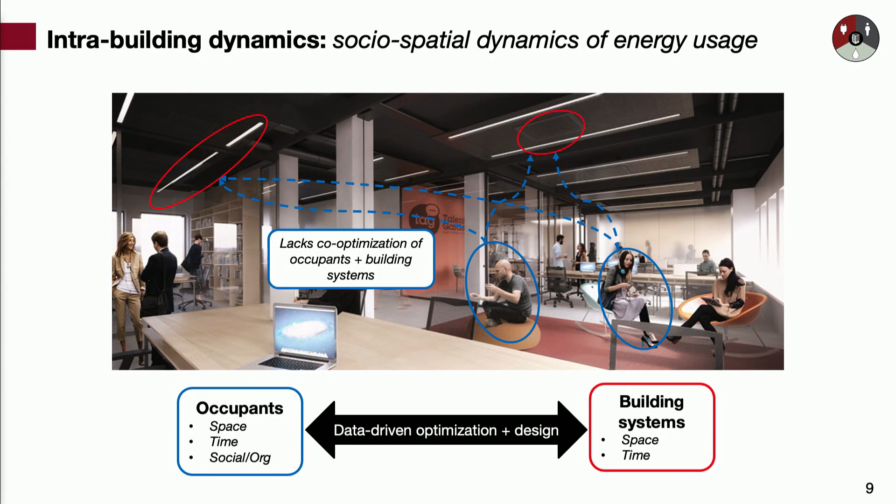We did a study with an office in San Francisco, which I'll call privacy-aware occupant state inference, where we can tell when people are working at their desk and how they're working. Happy to go into the privacy awareness of this, but the short answer is we did not use video cameras, because that was just not going to happen for many different reasons. We used a very cheap plug load sensor that could infer some of these things as to whether folks are there.

Sounds pretty easy and cool, hard to motivate people to do it. So of course we did a study to see what would happen if we did this in a 150-person-plus office. Great, we saved 5% of energy. It's a pretty low-cost solution of just moving people around.

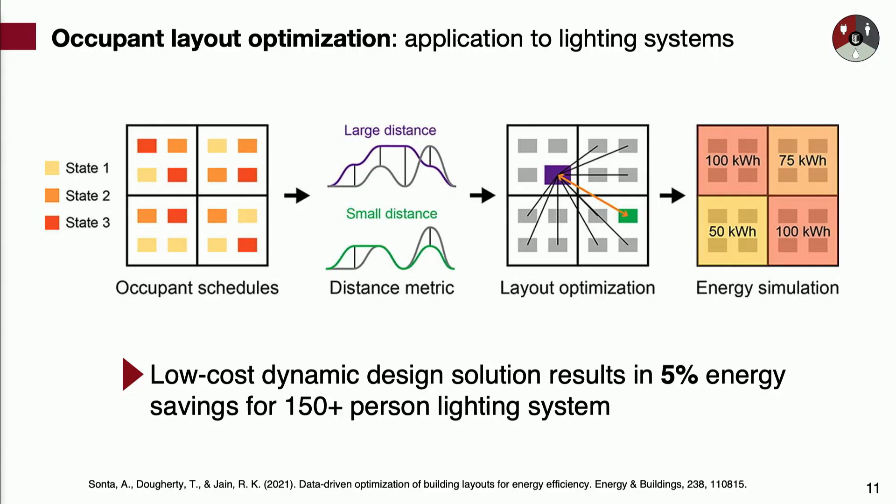Took this to some colleagues who work for a company that rhymes with Oogle. I'm not going to give you any names, but they told me, 'Hey Rishee, this is cool, but we're probably not going to implement it, because this is how we think about things: energy is $1, space is $10, maybe $20 depending where you are in the Bay Area, and people are $100. So if we're not incorporating the people dimension in this, then it's a hard sell.' It's a hard sell to move people around and do this.

That got us thinking, and credit goes to one of my awesome PhD students, Andrew Sonta, who's now a faculty member at EPFL in Switzerland, who said, 'Let's start thinking about this a little differently.' When he took some classes over in the business school—it's a long bike ride away, but not that far—with Amir Goldberg, who's an organizational scientist and thinks about how teams come together and do work.

We started to think about this to say, there's some opportunities for social interaction. If we start to understand when people are available to interact with their colleagues—sometimes you want to be heads down working, sometimes you're not even there—how do we maximize this so there's some collaboration? This work was all done pre-COVID, so it actually died down for a little while, but now that folks and companies are bringing people back in hybrid, it's becoming interesting again.

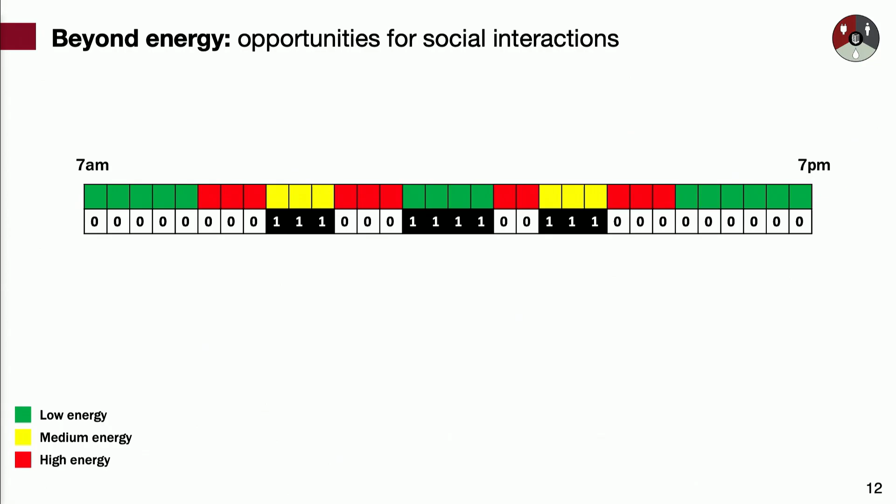So this is a time series of one individual from 7 a.m. to 7 p.m. Once they're in red, they're kind of in the office, and here's how we code it: yellow is a good time when they're actually okay with interacting, maybe doing some light email work, a few things here and there. We can see another person, and we can start to identify potential opportunities for this social interaction, which could make a more collaborative space. We can also look at this over time of when these interactions occur, when these opportunities occur.

As you start to gain this knowledge, our future vision is to really think about how we design energy efficient and collaborative spaces, because then we can really hit that top 100 mark. So we can piggyback onto sustainability by asking how do we use energy in the most effective manner to maximize human output. That's where this work is going.

So we'll now move to the community scale. And with that, I invite you to board an emissions-free flight to Mumbai. Virtual, of course, and instantaneous, right? But of course, emissions-free.

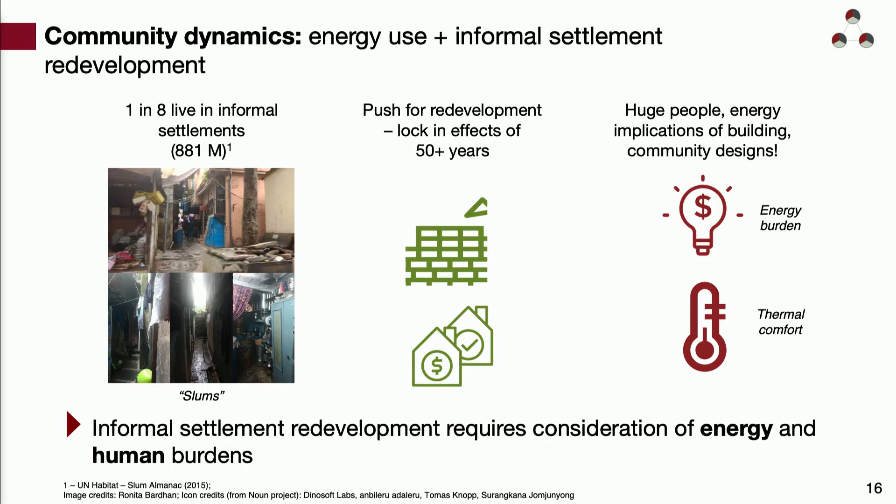This work is really centered around informal settlements, and the reality is that 1 in 8 people on this planet live in informal settlements, colloquially known as slums. The challenge here is there's a push for redevelopment. Many of them are in prime real estate, so they're going to get redeveloped, and once they're redeveloped, there's 50+ years of lock-in effects. There's huge implications for people's lives, like energy burden and thermal comfort. So that's what motivated some of this work.

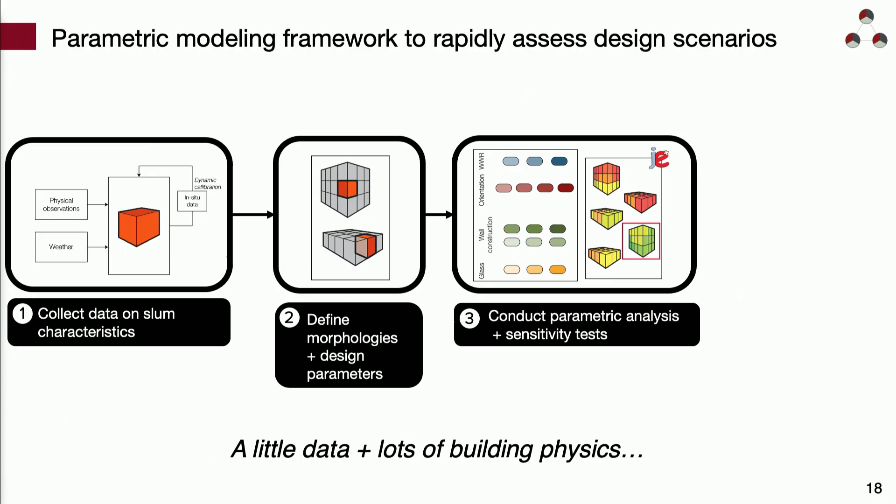So it turns out what you do is a little data and a lot of building physics. The way we started thinking about this is, we can collect some data on some characteristics, build an archetype of what that looks like, and calibrate that model. Then we can define some morphologies and key design parameters based on local literature of design practices, and start to do some sensitivity analysis to explore the solution space. While we can't get exact numbers of what's going on, we can start to identify the big low-hanging fruit for challenges, in particular regarding heat stress, and then evaluate the situations and what we can do.

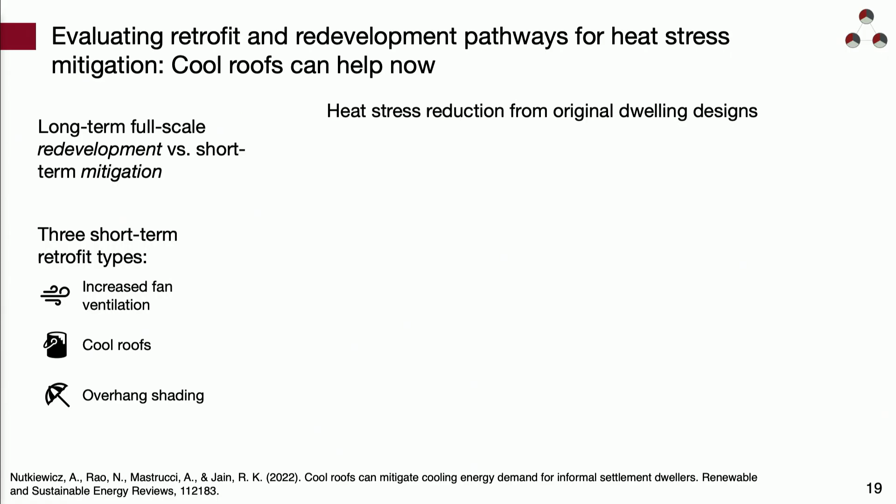So we did this across many different informal settlements across the world, and we modeled 3 types of short-term retrofits: increased fan ventilation, cool roofs, and overhang shading. Then we also modeled some redevelopment scenarios, and I'll share a bit of the results.

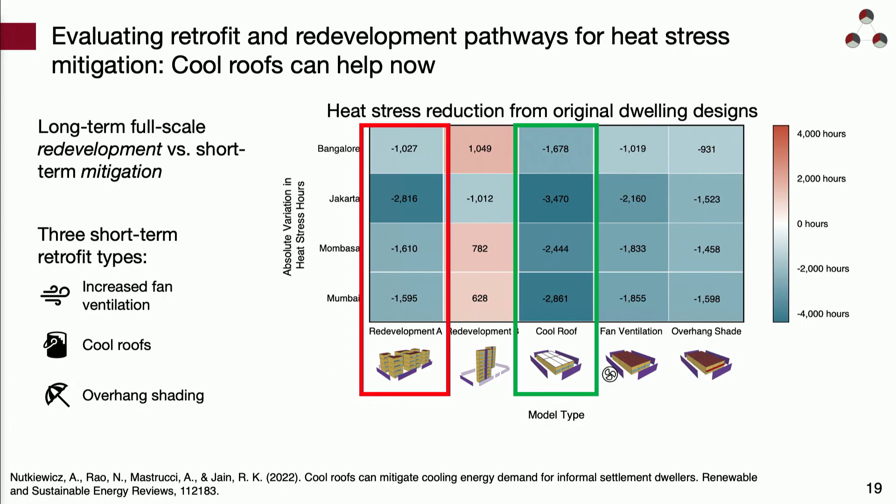The second thing I wanted to point out is that when you do redevelopment, these are 2 simple scenarios we modeled, and you actually see a big difference between the two. My opinion is that redevelopment will happen and should happen eventually. So what this points out is we have to carefully think about that, because we could actually make things worse by not doing it carefully when we're talking about heat and thermal comfort. So, things to think about.

The future vision here is actually thinking about natural cooling and comfort, but we have changing environmental conditions.

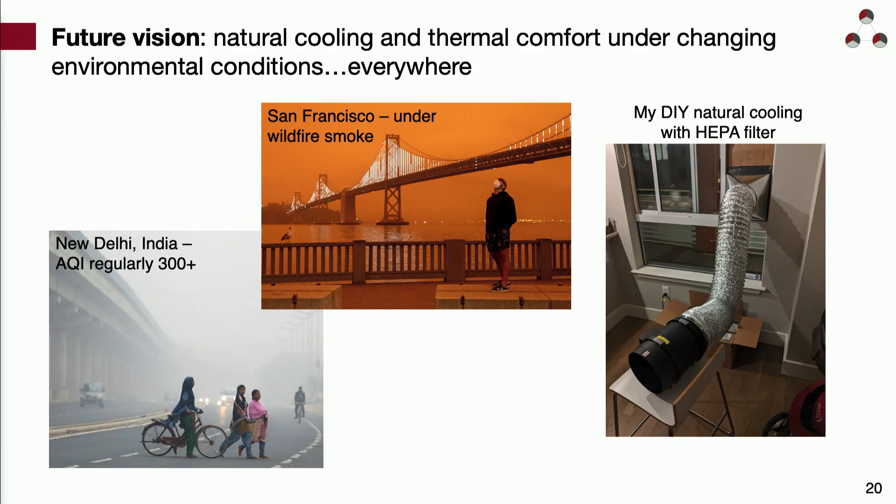A big part of my work is advocating for natural cooling, but that's based on a flawed assumption that the air is clean outside, and there are challenges—we've all been way too familiar with this. This is my DIY natural cooling with a HEPA filter I built during COVID when my kiddo was a year old and we were sweating in our apartment. But it's starting to evolve as to what we want to do, and now the idea is how do we think about it with changing environmental conditions.

All right, let's zoom out. We'll fly back here to the Bay Area and come back to San Francisco to talk a little bit about the urban scale dynamics.

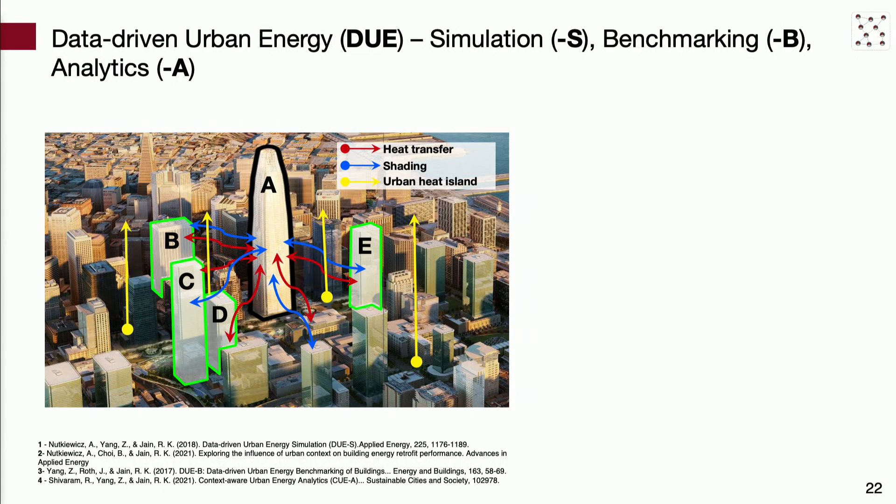So we started to develop a series of tools for different stakeholders that could be developed at the urban scale. I can't take credit for the acronyms—that goes to the students who decided to continue it on. I thought the first paper came out as DUE-S, which is Data-Driven Urban Energy, and then they decided to come up with new names and continue the acronyms as we went on. So the first one is for designers and owners.

It's really trying to ask the question: what is the energy impact of design changes or retrofits given this urban context? And it takes the power of data-driven models, machine learning, but combines it with the physical models that we do.

The second one is for policymakers. If you're looking at an entire city and trying to ask which buildings I should be targeting if I'm trying to reach a particular decarbonization goal—who do I give a passive incentive to, who do I go and send an energy auditor to—it's a little more sophisticated. And finally, if you're thinking about this from an urban planning perspective, what are the impacts other urban systems have on energy usage?

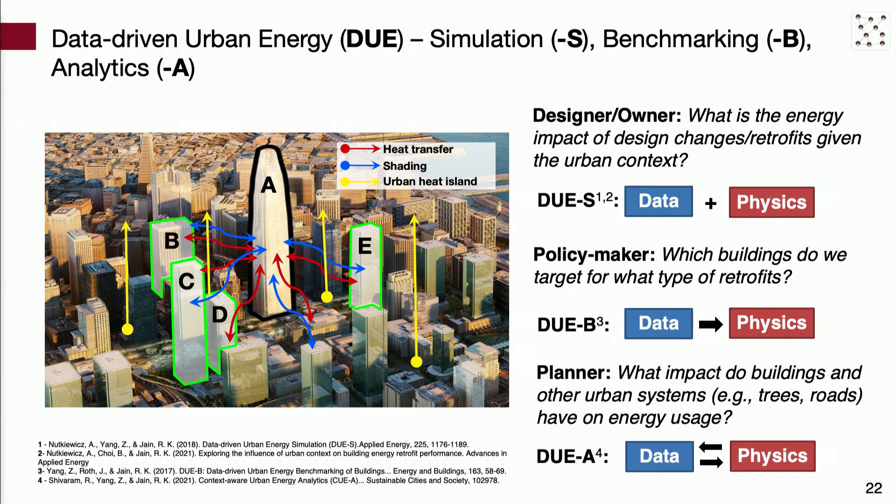I don't have time to go through all of them, so I thought I'd walk you through just the DUE-S model and our thinking behind it, and some key results.

So what we do here is create a baseline energy simulation. We combine it with machine learning, and then we can do some nifty things. The key thing to think about is why combine these two things?

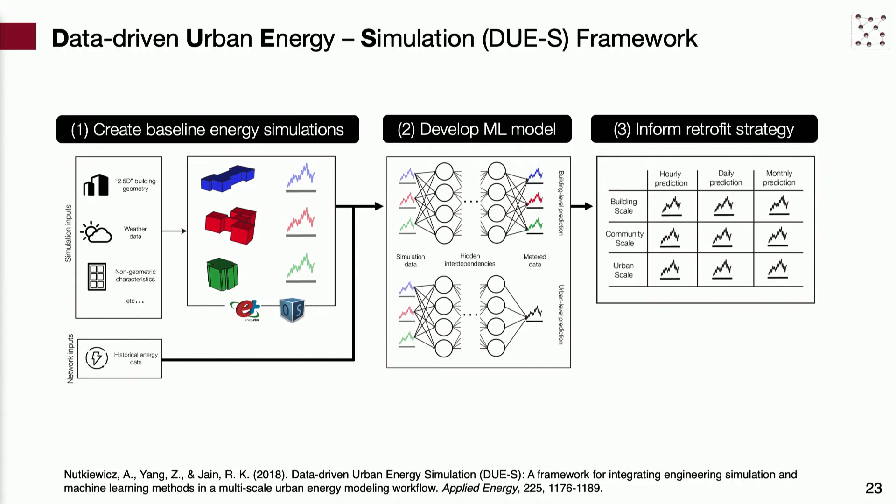Well, the physics-based models are really, really hard to scale up. You need detailed information about what's in the building, what kind of materials are in it. On the flip side, the machine learning models can't actually predict anything, especially if you change the underlying physical dimensions. So if you say you're going to retrofit a particular building, the ML model sort of falls apart because it's never observed this type of data.

So in summary, I think I'm running out of time—I see Vanessa looking at me.

I will highlight that when we implemented this in Sacramento's downtown area, by using this kind of model, we could actually reach their decarbonization goals by retrofitting 50% fewer buildings, if you can exploit the aspects of the urban context.

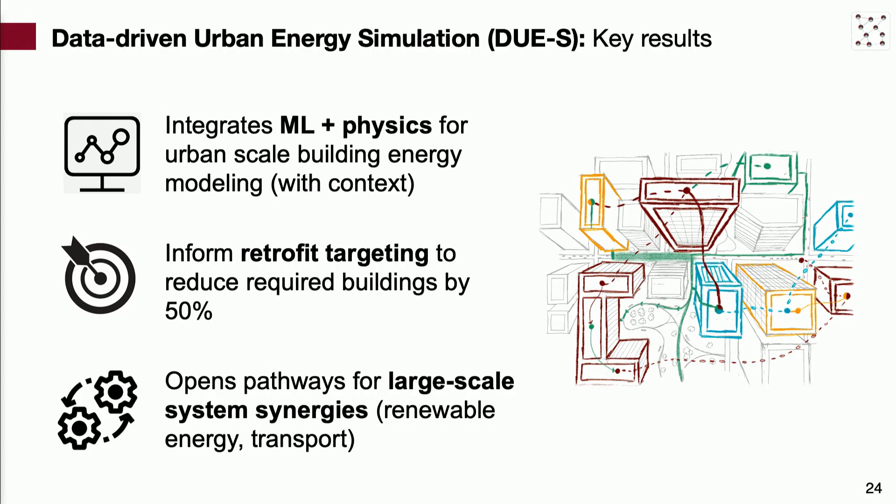And this opens up pathways for large-scale system synergies on renewable energy and transportation. That's really where the future vision is on this—trying to think about the challenges we have around affordable housing, land use, and energy sustainability, and how they all come together.